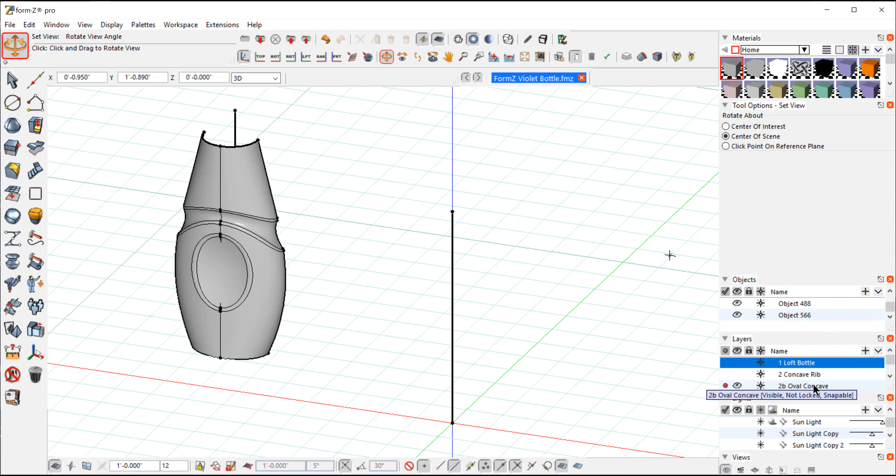We're going to go back to my layers, and we're going to go to layer 2B, which is this next in-mold detail. So we're going to go back to layer 1. I'm going to bring that up.

If you remember last time, we had this part of the bottle. It's just half of the front half that has that rib in it. So right now it's in three surfaces. I took it apart and took the radius out because I'm going to do all that radiusing at the end.

So let's select these 3 surfaces. Again, we go to our move tool, click very quickly so it just moves in place and doesn't change location.

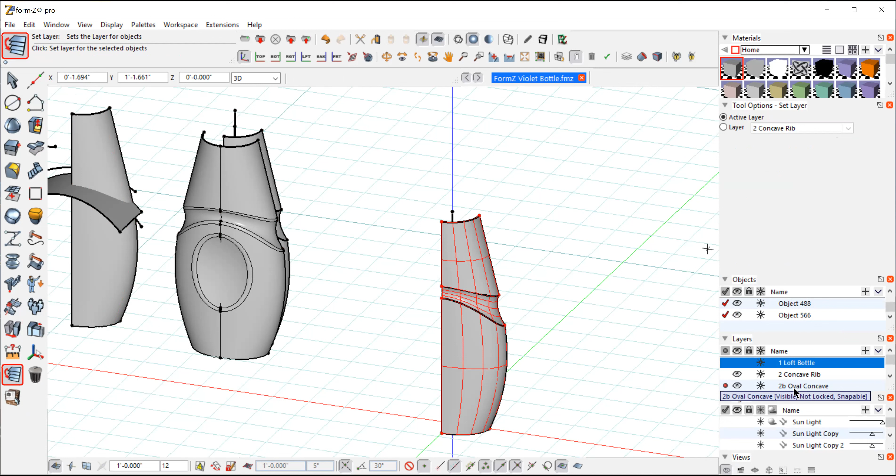Then I'm going to go down to my layer tool, down in the attributes. I am going to make sure I have the layer with the red dot is the one I want to bring this part to, so I'm just going to click. So those parts are now on that layer. I'm going to deselect the layer I took it from. So now I have these parts here.

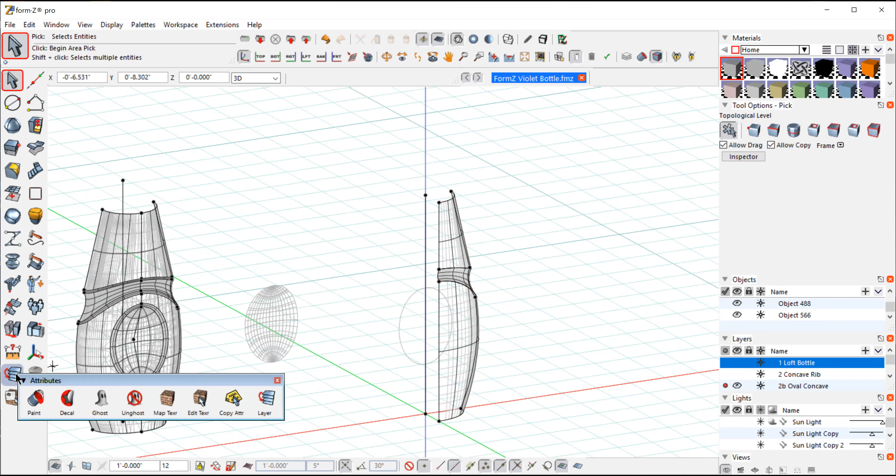I've already set up the oval. Again, this is kind of arbitrary, this is more of an aesthetic decision. I'm going to unghost this, so I have that right on that back plane. If we look at it from the front, that's where I want to put that oval. Again, it could be any size I wanted, I could move it around. So I selected to do that there.

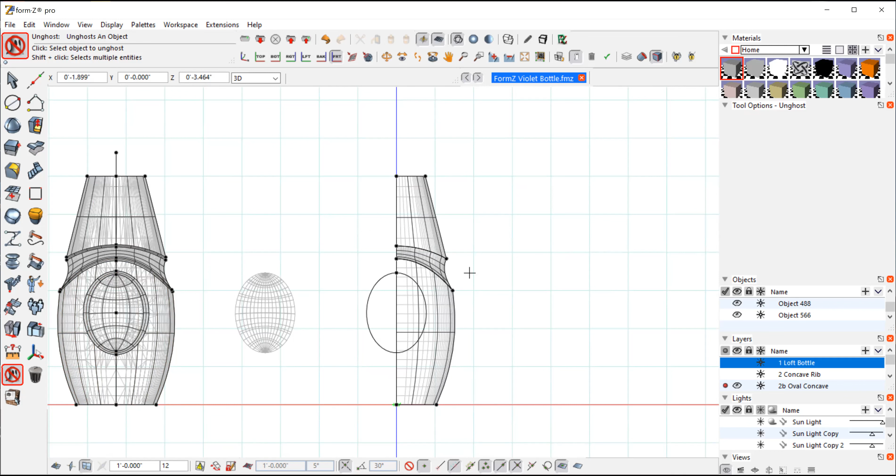You have to remember in this trim split operation, you need to be looking in the correct axes. These need to be lined up. I can't do the trim split action in perspective, it won't go on straight. So we need to do that from the front, and it also helps to see exactly what we're doing.

So again, I'm going to go to the trim split tool. We're going to be on line. I'm going to grab just this bottom part, I really don't need the whole part, I just need this bottom part. But I'm going to select the part that I want to keep, and I'm going to use the line to trim away the part that I don't want.

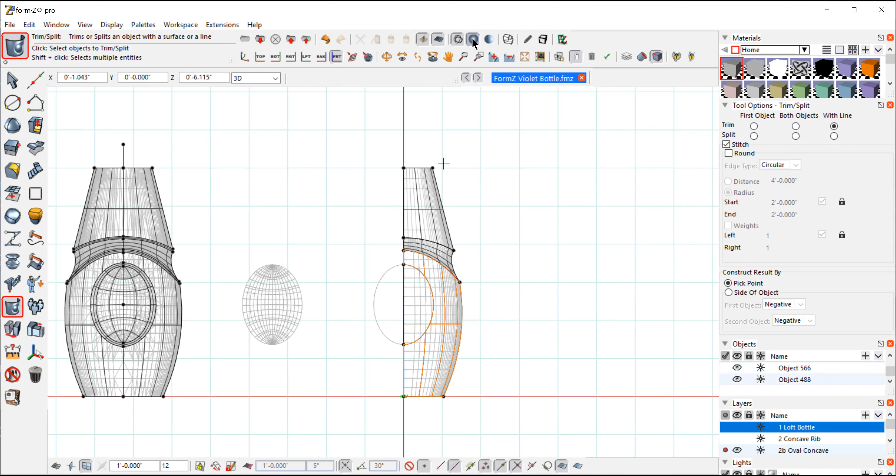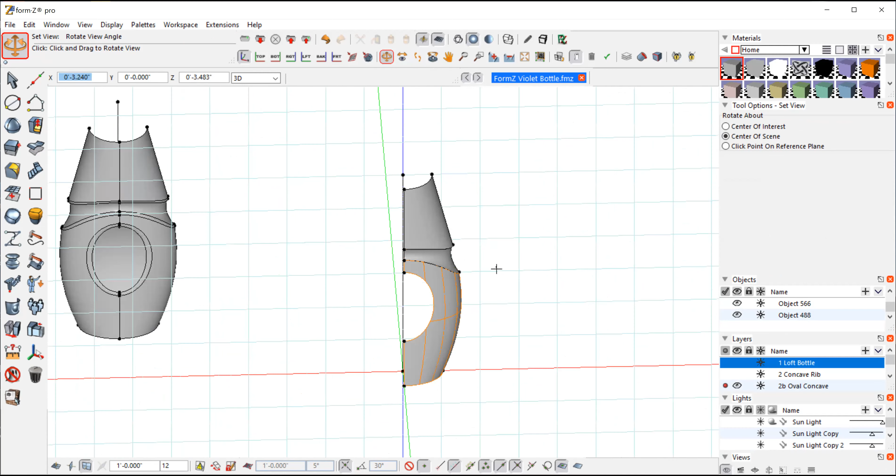Again, I'm doing this on this half of the part and not the entire piece, because I constantly want to make sure things are centered. Sometimes when you do some of these lofting operations, it goes a little wonky, it gets a little crooked and doesn't quite line up, and sometimes you can't tell right away until you really go in and inspect it. And I've gotten myself stuck many times. So I'm constantly trying to break things in half, hang on to centers, and make sure things are nice and square.

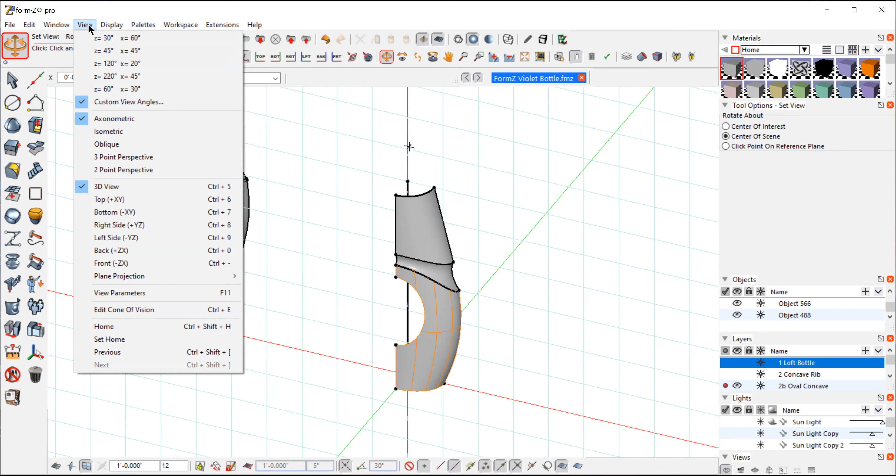So we are going to do a 3 source loft again. So let's look at this from the right side.

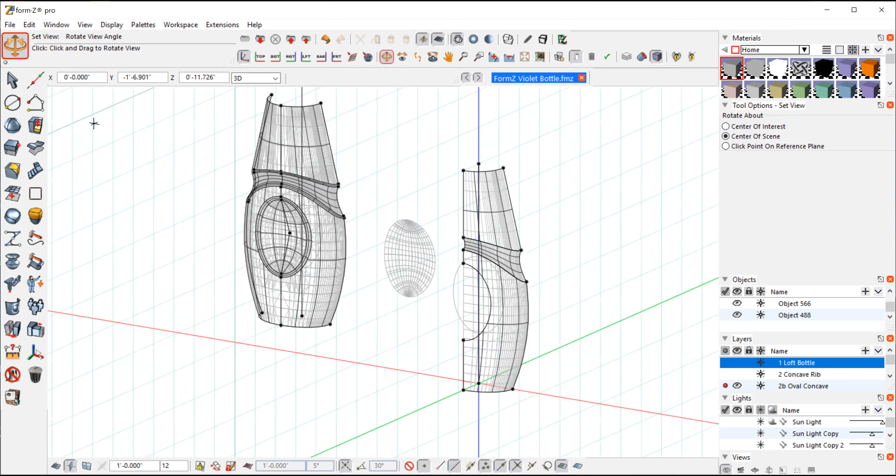Now I'm going to go into line. You can see I have this line back here that I created last time. I'm just going to use that as a guide because it worked pretty well. So what I'm going to start off doing is just taking a straight line, and I'm going to make a straight line from the top of this to the bottom. That's just a straight edge right there, there's nothing unique about that.

But I'm going to insert a point. So if I go to my edit tools and I have insert point, I'm going to click on that line and it's going to snap to the middle, and that's where I want it. I want it in the center. So I'm going to snap. Whoop, didn't do it. There we go.

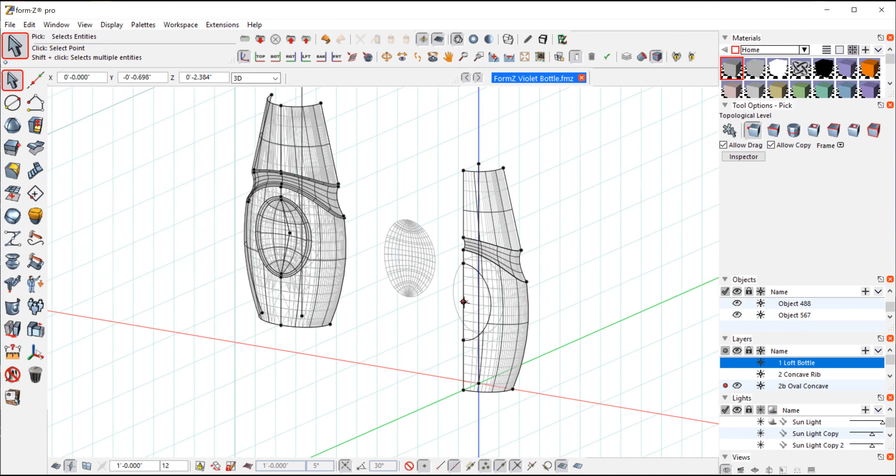So I'm going to select that point now here. Well, I see that, I'm going to select that. View right side, let's move it a little. You can see the other line that I created over here. Now I did that just by moving this line. Again, I'm going to move, and I'm snapping horizontal and vertical. I'm just going to click in space here, and let's go straight back. Oh, I'm moving a copy, don't want a copy.

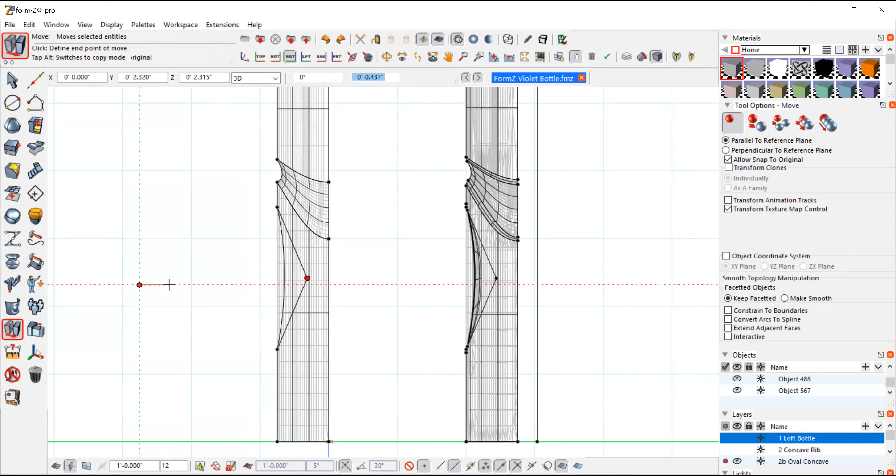I'm going to move that back to approximately this ISO line, because that happened to be nice. So what I did was trial and error. I just moved it, clicked on it, looked at it, and said yeah, that's about right. Then I did my loft, so I'm going to have it about there.

What we're going to do to that is make it a curve. I don't want that to be a hard edge, I'm going to use that as my control. So I'll go to my end curves tool, curves create, with it set on 2. Now it's going to click on this line and make this nice curve. That's a nice centered curve, representing this negative curve area on center.

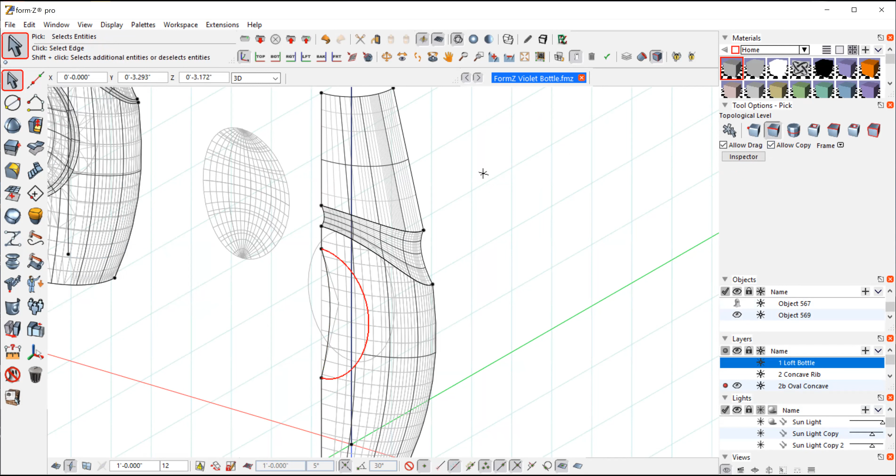So I am going to select that edge there. If I mirror that to the other side, I will get a copy of it, and I'll get the other line I need to create this loft. So now this loft is connected and will line up perfectly with that front surface.

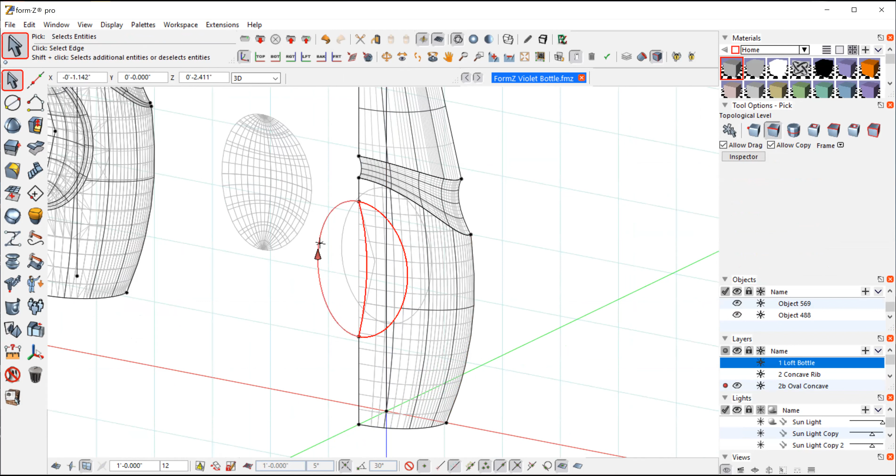I'm going back to, actually we have to do this with the segment tool because this segment here is part of the surface. So I need to select that as a segment. The other two are objects, but I can use my segment tool to select them. So now I have all three in order, left to right or right to left is fine.

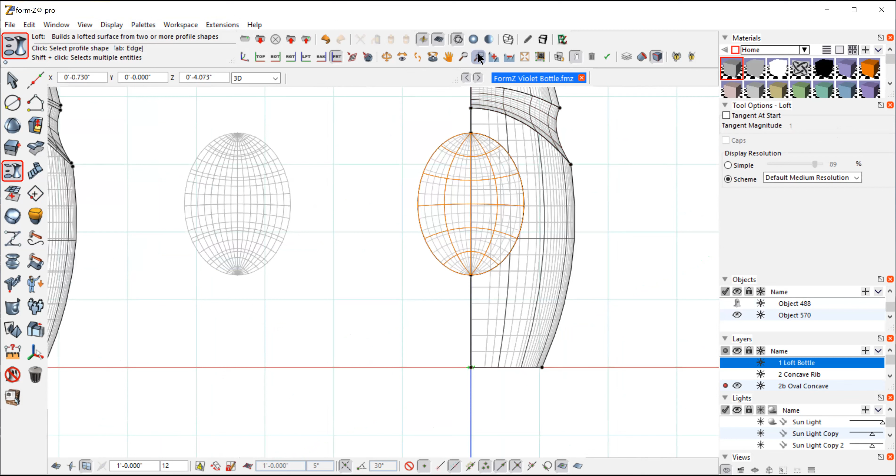And I'm going to go to my tangent loft. Now I have this nice shape. This is part of what I want to confirm here - that center line, I want to make sure that's centered so the part is nice and clean. So let's just come in here. That looks good.

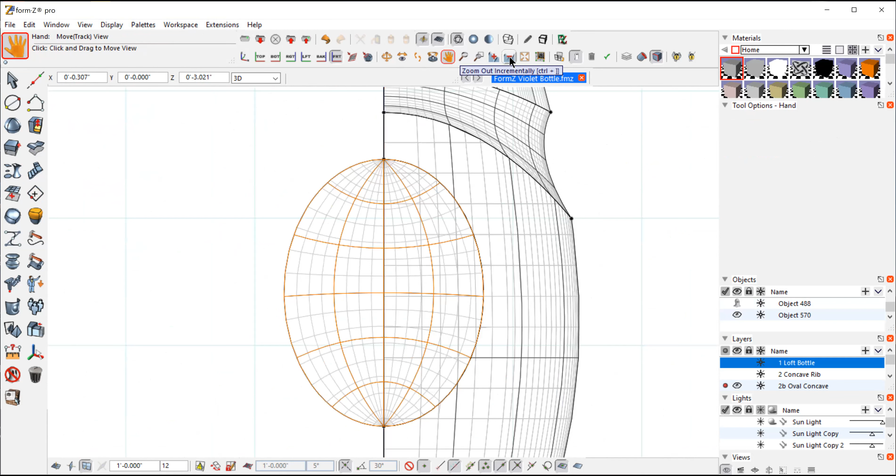So if that wasn't on center and it was a little crooked, what I would do is take this center surface, cut it in half to get one half that's great geometry, and then just mirror it over so I'd have a center line. That came out quite nice, so I'm going to use it as it is.

So now I have that perfectly centered. Now I'm going to bring my other parts over. I could have brought them over first and used that, but like I said, I want to check this geometry as I'm going. So now all I have to do is mirror this over.

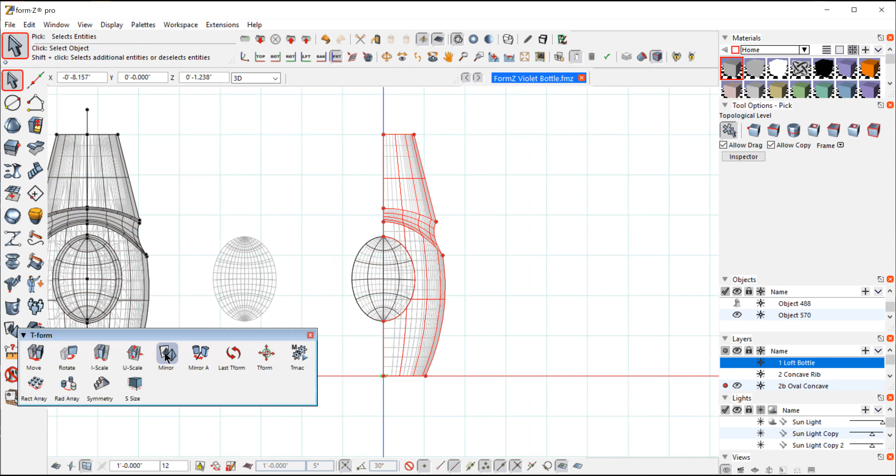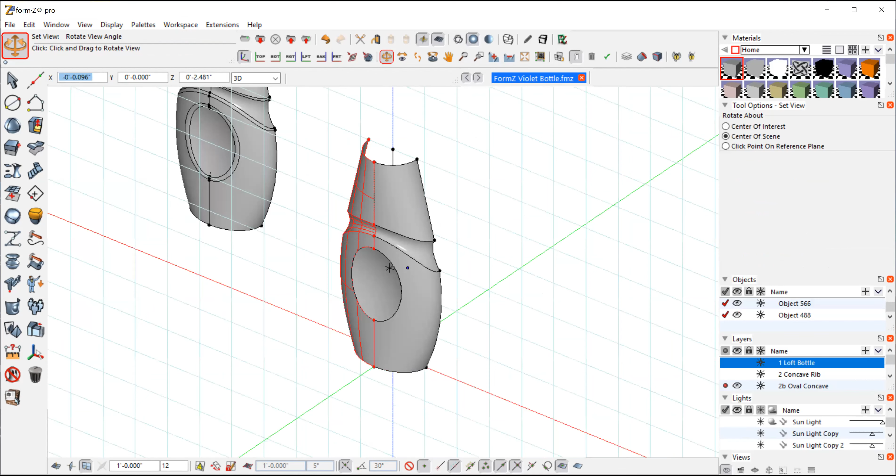Oh, I needed a copy. So now I have all these parts. And again, I'm just working on the front half of the bottle. So once all this detailing is done, all I have to do is mirror the entire part around to the other side, and I have my complete shape.

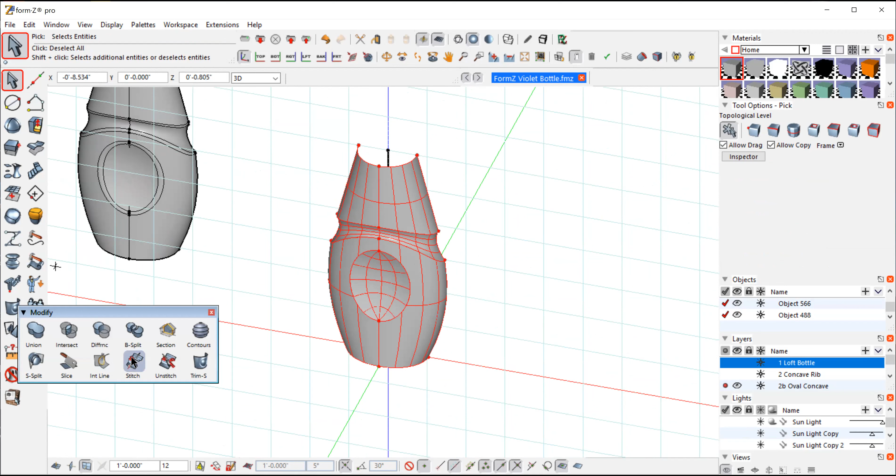So again, just to demonstrate eventually what's going to happen with all these, I'm going to select all of these surfaces and our new little center dome here, and go to stitch. So now this is all one surface, and we can check that with our inspector like we did last time. Let's just radius around.

This is individual selection of segments. I can also select this tool, which does a sequence - a little quicker, it selects both of them at the same time. And I'm going to go to round. Last time I did 1/8 inch, I'm going to do a little bit bigger this time because I think we have some room.

This probably will be where your fingers go in, or your thumb, so I'm trying to get that a little softer. So we're going to do that at 1/4 inch. So that radius is quite nicely in there.

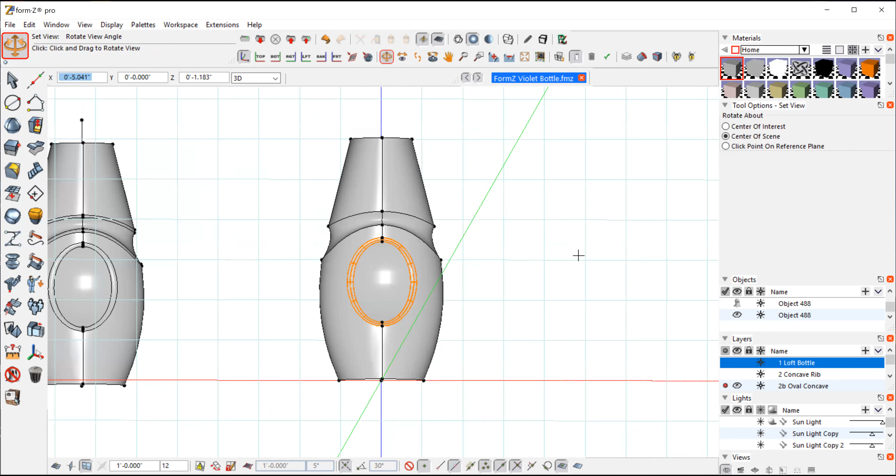And since this is a surface, we can see everything from behind. So you see I have this nice center line. I could have continued that center line through the part before I stitched it, but the part looked really clean. So I think we're in pretty good shape.

Okay, so that's it for this tutorial. The next one, we're going to stitch this all together and make one solid bottle out of it. We'll do that in the next tutorial.